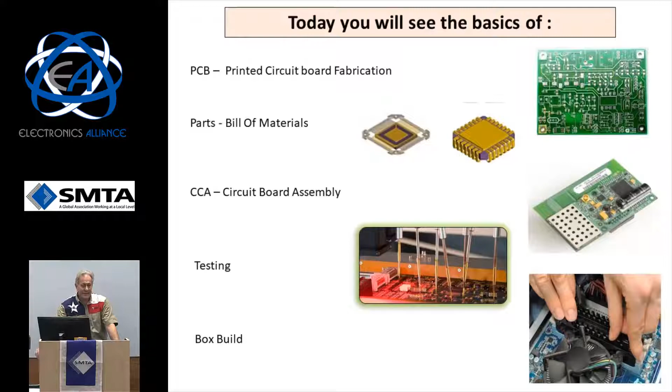So what I want to talk about today is PCBs, printed circuit boards, fabrication, a little bit on parts, a little bit on circuit board assembly, a little bit on testing, and if we have time, I'll touch base with something called box build. How many here are familiar with how multi-layer boards are fabricated already? Okay, you got some familiarity.

Okay, very good. So the top surface that you see over here, you know, we've got the solder mask with solder pads, and really circuit boards are multiple layers of two-dimensional circuits. So if you look at this circuit here, this is actually about a 6-layer circuit board, so 6 semi-independent layers that are all connected with vias that go through the board.

So the way electronics is done is you have individual layers as far as routing, and you connect one layer to another layer via these vias that go up and down, and then the circuits are connected on there. There's imaging going on, so it's a subtractive process. So you put materials on a circuit board and then you etch them off to leave a pattern. So you see about etch, and there's all kinds of photo masking, and then there's all kinds of routing that goes.

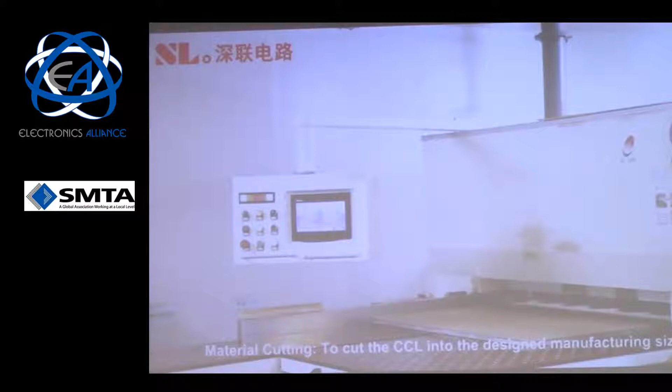Copper-clad laminate. It's the main raw material in PCB manufacturing, and also one of the main factors for PCB quality. Material cutting. To cut the CCL into the designed manufacturing size. The radius for CCL corner is needed to avoid the scratch during production.

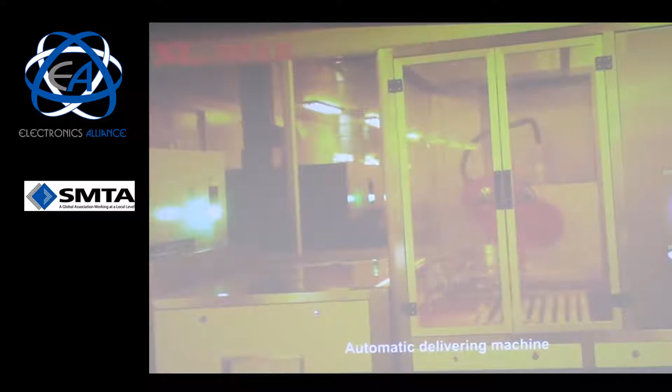Inner layer coating. To coat the photoreceptive wet film on the surface of the clean CCL. The requirement of clean room: 10K degree clean room. Automatic delivering machine. Automatic exposure machine. To transfer the pattern from the film onto the inner layer core material.

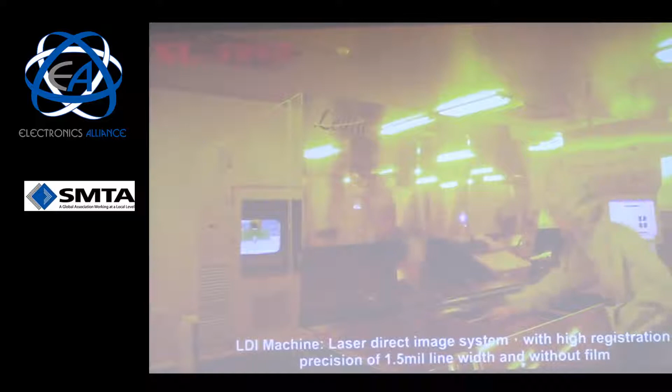Laser direct image system with high registration precision of 1.5 mil line width and without film. CCD automatic exposure machine. Traditional exposure system with film, transferring the pattern from the film onto inner layer core material. DES: developing, etching, and stripping. To etch the unnecessary copper and leave the pattern in need.

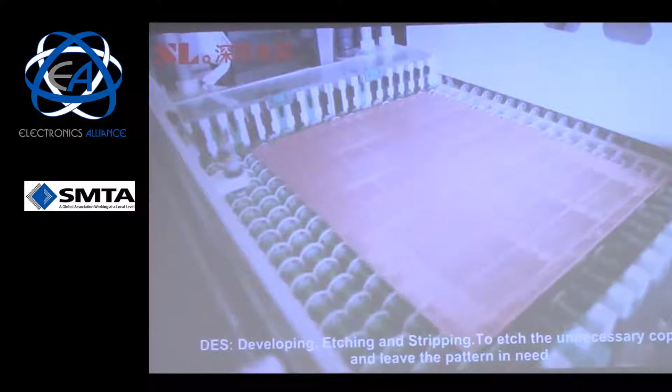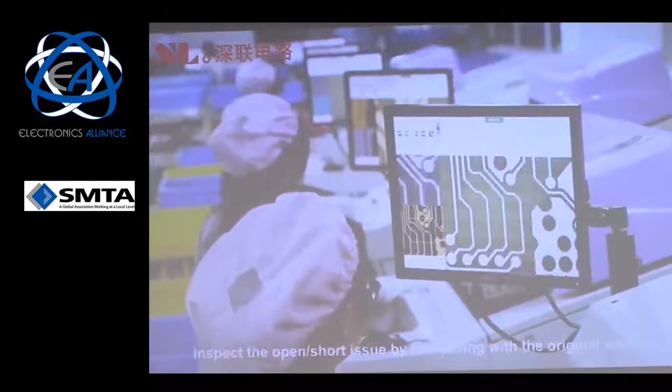Inner layer AOI, automated optical inspection. Transfer the image to the machine with optical reflection. Inspect the open short issue by comparing with the original working Gerber. Cutting PP. Cut the prepreg into the optimal panel size according to inner core material. Riveting. Rivet the inner core materials together with prepregs to avoid misregistration in the following production.

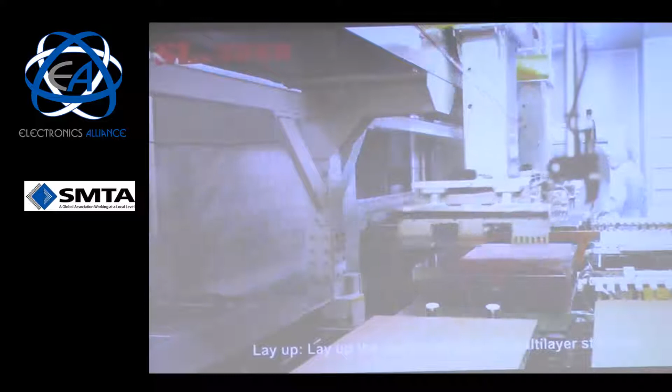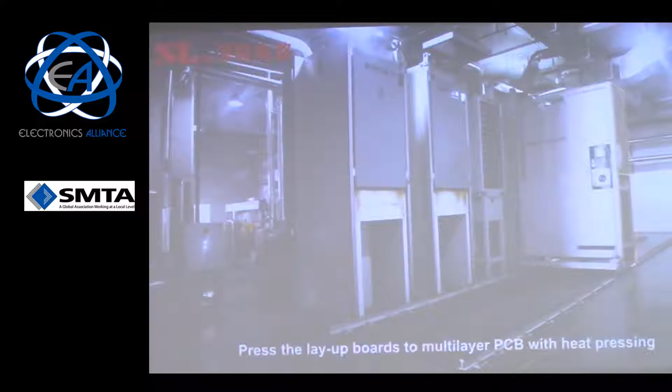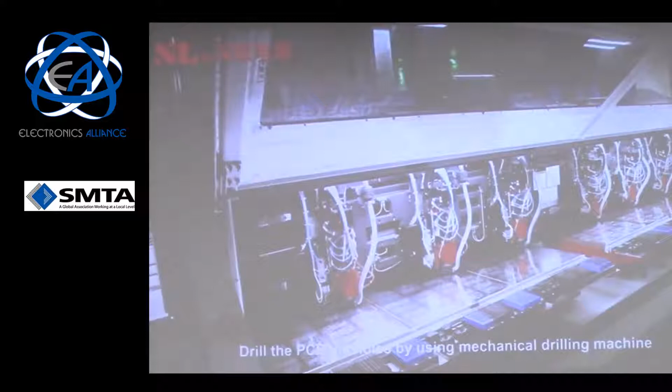Layup. Lay up the raw materials into multi-layer stacking. Pressing. Press the boards in high temperature and vacuum conditions. Press the layup boards to multi-layer PCB with heat pressing. Cutting edge. Cut the outlines of the pressed multi-layer boards. Mechanical drilling. Drill the PCB via holes by using mechanical drilling machine.

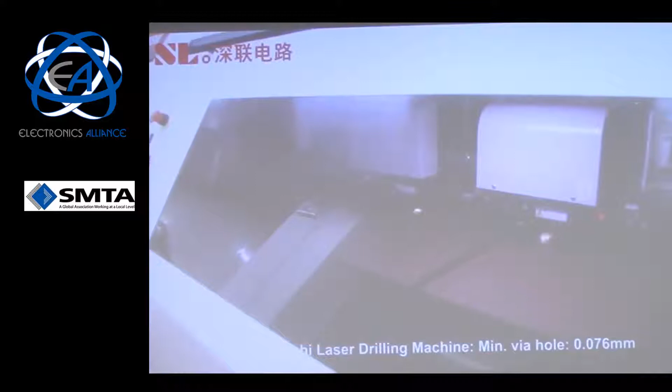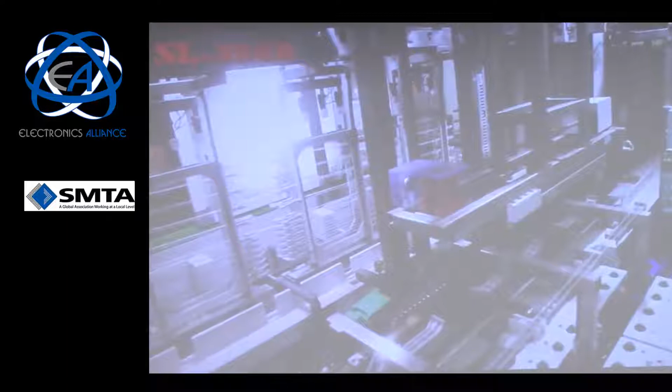Mitsubishi laser drilling machine. Min via hole 0.076 millimeters. PTH. Plate the copper in holes to make sure of the conducting. Panel plating. Thicken the hole copper and surface copper by plating. VCP. A machine with vertical copper plating system. A better copper plating performance could be achieved with the same manufacturing conditions of the same PCB part number.

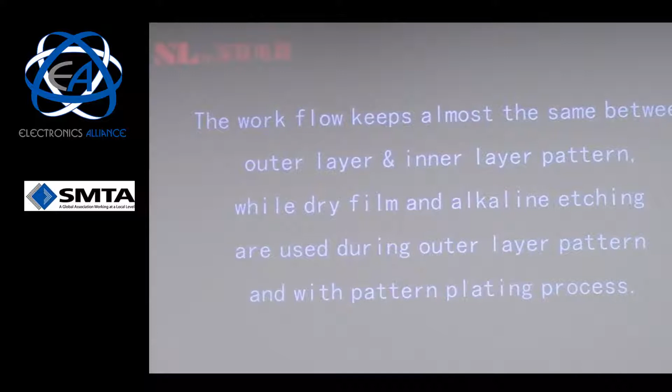The workflow keeps almost the same between outer layer and inner layer pattern, while dry film and alkaline etching are used during outer layer pattern and with pattern plating process. Dry film laminating. Outer layer developing. Pattern plating. Outer layer etching.

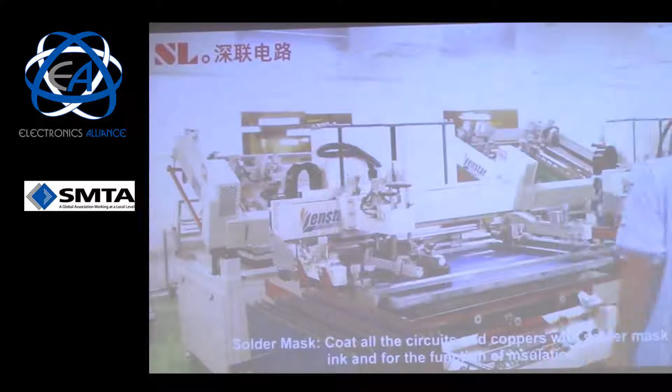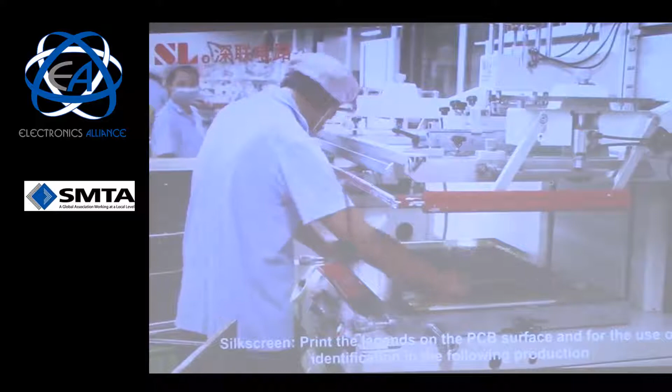Solder mask. Coat all the circuits and coppers with solder mask ink for the function of insulation. After the photopolymerization of developing, the solder mask ink remained and solidified. Silk screen. Print the legends on the PCB surface for the use of identification in the following production. Immersion gold. To form a cladding material with high performance of inoxidizability and solderability.

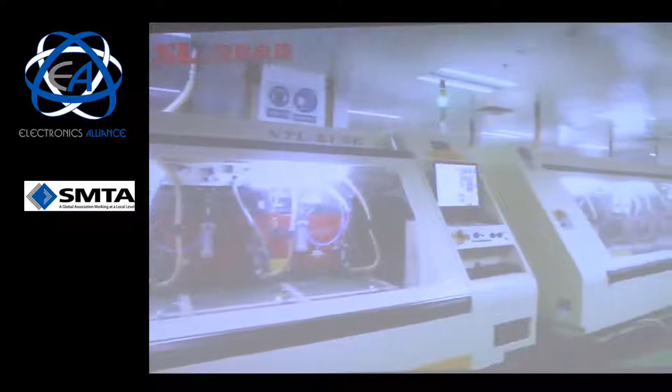Routing. To route the customized PCB outline with CNC routing machine. E-testing. To inspect the open short issue for finished PCB. Flying probe tester. For the inspection of prototypes and small volume orders.

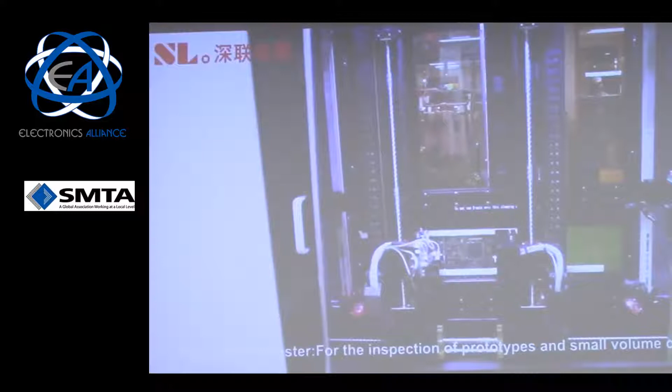FQC. Appearance inspection on PCB boards such as scratch, no solder mask ink, solder mask ink on pad, and so on. Automatic appearance inspection machine. The efficiency will be tripled comparing with human visual inspection.

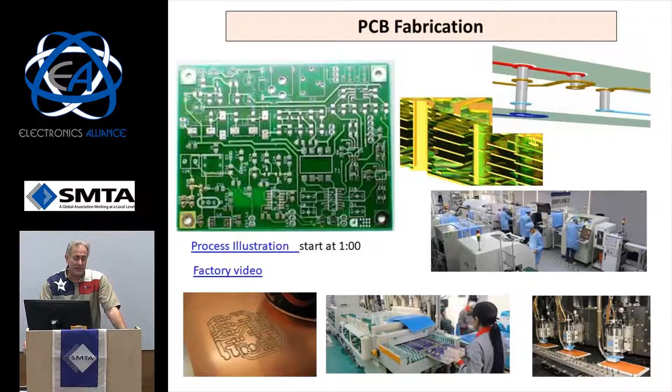Okay, I'm going to kind of move on from there. I want to give you at least a background on how boards are fabricated. PCBs are printed circuit boards. People call them PCBF for printed circuit board fabrication and PCBA for printed circuit board assembly.

In the additive process, that basically is starting with nothing and building up the circuit board from the bottom up to the top. So you're printing out insulating material, conducting material, building it all up. And you can do that now with additive manufacturing or 3D printing machines.

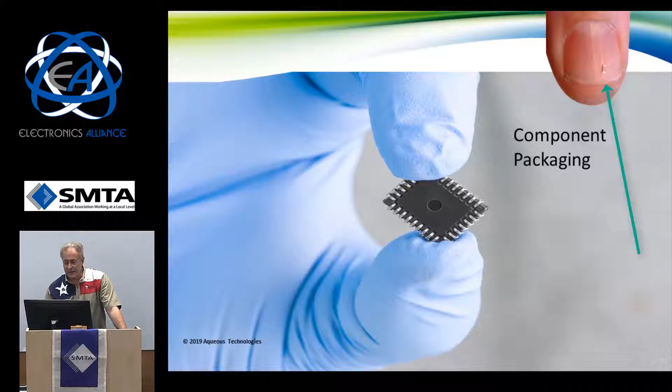What I want to talk about now are components. So years ago, this was considered to be a pretty small component. You can see that in here. Some are much bigger than that. So I'm going to talk about components in this phase. But if you look over here, there's actually a component right here on the fingertip. So parts are certainly small. Okay, I put this on here to show three different things.

Basically, in the 1960s, through-hole technology was in place, and if you look at upper left-hand corner in the 60s, these are all components that have leads that go through the board and are soldered from the backside. In the late 1970s, surface mount technology was created, and parts are soldered onto the top surface and onto the bottom surface of the board, so you got double-sided assemblies.

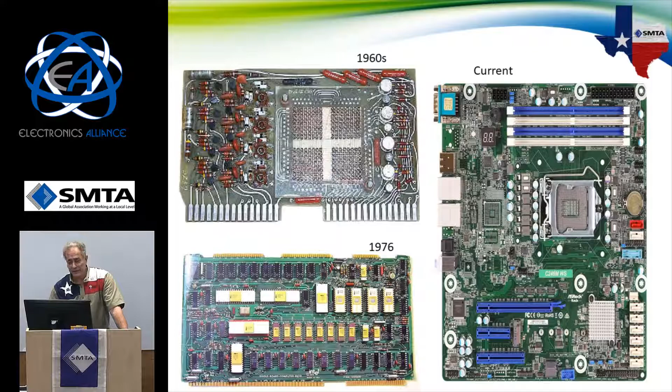And currently, you can tell a little bit by how much green you see. The green is a solder mask where there's no parts, but you can see all of the silver in here. That's actually solder. There's little tiny parts in here that you can't even see. So current technology is a mixture of through-hole and surface mount, advanced packaging, and sometimes direct chip attach. We take the semiconductor and directly attach it to the circuit board.

I thought it'd be good for you to have a feel for some of the components. So there's things called chip components, resistors, capacitors. It looks something like this. Plastic leaded chip carriers, PLCCs, quad flat packs. They're flat and they have leads on 4 sides. Small outline integrated circuits with the little leads here, J leads.

Over on the right, I put these through-hole parts. These are called radials. You notice it just comes straight out. Dual inline package is like an IC, which got little wings that come out that go through the boards. And then axial parts come out the sides, and they have to be bent in the manufacturing facility and then installed into the circuit board that way.

A few other pictures, just throw out some acronyms. I'm not going to go through all of them, but every part's got a different acronym with it. And I'm just showing here a better picture of the DIP and axials, radials. These are some of the discrete components I've got shown up here.

0402s right on down. This is a match head, so you know about the size of what a match head is. There's a little part right over here, 01005, so it's 10 by 5 thousandths of an inch, things like that. Pretty darn small, so you can imagine trying to solder something like that onto a circuit board. So we have the technology to do that, and that is commonplace now.

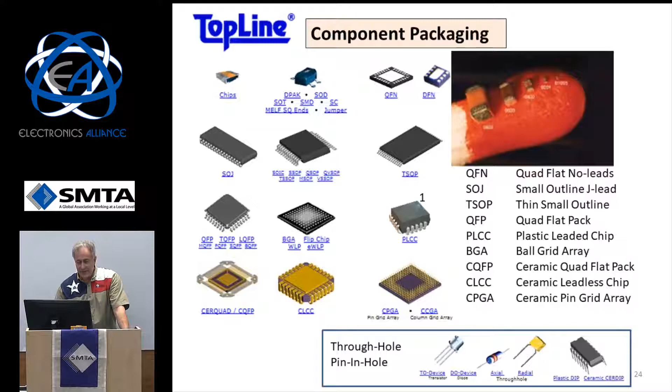Very bottom terminated parts. How many? I know most of you are electricals. Are there any mechanicals in the room? Okay, so I'm a mechanical also, and so we need mechanicals in there to package things up.

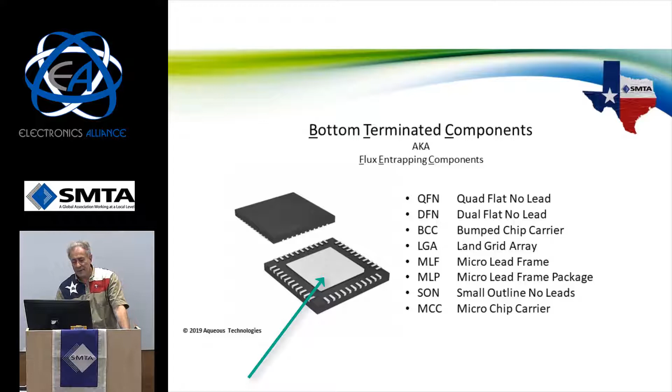But from a structural point of view, this big pad on here is to take the heat from the component and bring it down into the circuit board. There's a number of different mechanisms by which you can do that.

Now I'm going to talk a little bit about circuit board assemblies. So I've got some samples up here, and we've got some other information for you over here too about a meeting coming up and some other things about SMTA up here.

But a lot of different kinds of circuit boards. There's RF circuit boards. There's like transformer kind of things. There's some heavy copper in here, a lot of current going through here. LEDs that you'll see in lighting, all kinds of different lighting.

These are actually what they call rigid flex boards. It's rigid pieces of circuit board with some flex circuits between them, so that you can basically bend the circuit boards around different things. Small boards, back planes, power supplies, transformers, and big power supplies over here. So there's a lot of different kinds of circuit boards.

So what I'm going to do right now is, how many people have been into a surface mount assembly facility before to see how components are placed on circuit boards? Okay, good. So this will be a new thing for you. Anyway, so I got a picture up over here about a typical high-end factory. It's not a clean room per se. Semiconductors are in a very clean room, normally like 10 parts per million.

Typically around here, you'll see the smocks, but the smocks aren't in there for cleanliness. The smocks are in there for ESD, electrostatic discharge. The components are very sensitive to static, and the floor is conductive, the smocks are partially conductive, and there's a mechanism by which you can drain all the static electricity that you create in walking across the floor so it doesn't get onto the parts.

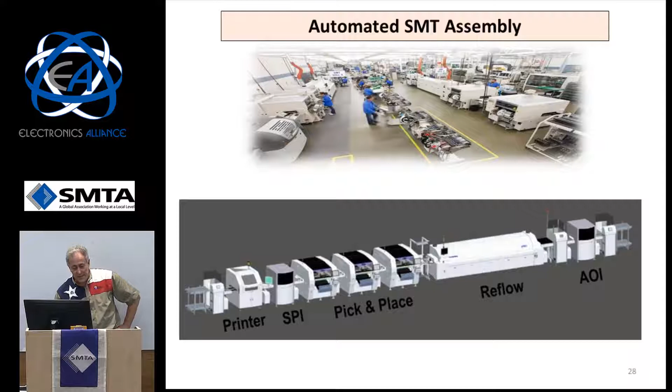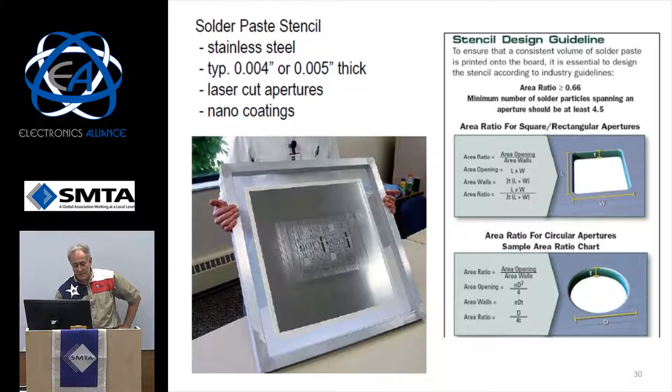So I'm going to click on an illustration here, and you'll see the stencil, and you'll see the machine, and you'll see a bar. And what it's going to do is take solder paste that feels like toothpaste. It's going to push it through holes in this stainless steel stencil. So there are laser cut holes in the stencil like this, and wherever there's a hole, it will deposit that solder paste inside the hole. And then when the stencil is pulled up, it leaves the solder on the circuit board where it's supposed to be. So I'll click on this here and see what that looks like for you.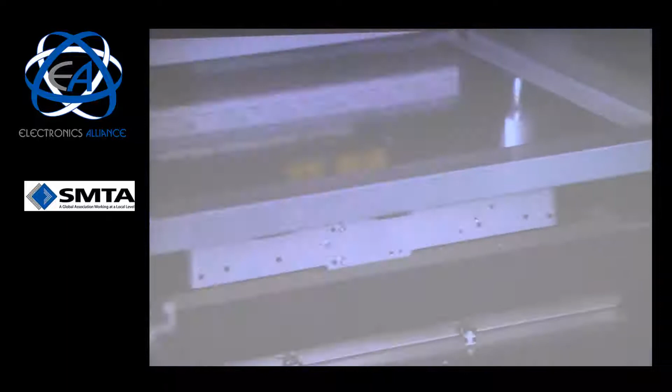Solder paste not only performs the function of a physical interconnection material, but it is the structural support, thermal interface, and conductor. It is critical to the manufacturing process that the correct amount of solder is applied in exactly the right place. We can accommodate a wide range of print formats. A laser-guided printer uses a scanning camera to quickly locate the fiducials and align the tooling and the PCBs accurately, while the transport system processes the boards with a minimum of handling time, and the solder paste height detection system guarantees the correct height of the fillet. The easy-to-use touchscreen makes programming faster and more precise. The printer prints and inspects each pad and solder joint after the solder is applied, ensuring the accuracy and reliability of the printing.

Okay, so this is kind of an illustration too. So you've got the squeegee over here pushing the solder into it, and you see the solder paste over here. And I put this out here so you can see that it just puts solder on the precise locations that the component is going to be mounted to. So the solder at this point is not reflowed. It's tiny spheres of solder that are held up in a flux. So it's literally a paste sort of thing. And then the parts are placed in that paste, and the flux and the paste actually help hold that component down.

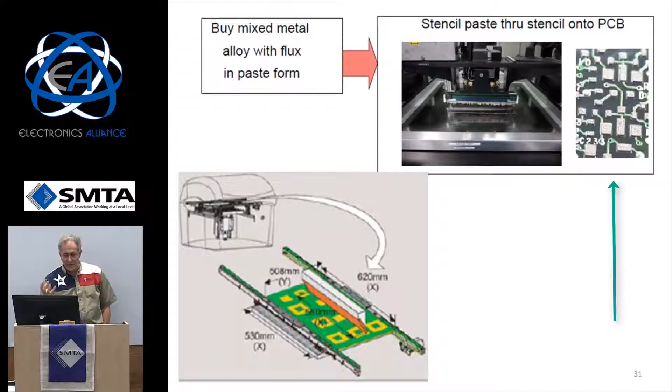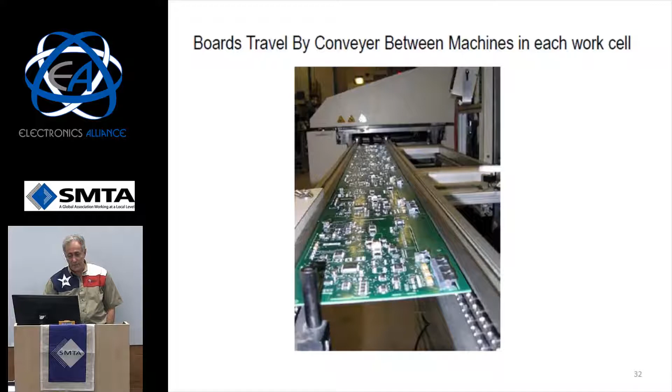And then because this is an inline versus a batch, between every one of the machines there's a conveyor. The conveyors are adjustable, typically from 4 inches to like 18 inches wide. So you would set up a line, adjust all the conveyor rails to the proper widths, and all the circuit boards will move through the line. So obviously you want to make sure that you have something on the edge so components aren't going over the edge of the board. So there's a lot of things when you design circuit boards so that they go into manufacturing. And whether you're an EE or an ME, you've got to make sure the parts on the board are placed correctly. There's 2 different component placement machines, basically. One places the small parts very, very quickly.

There's a lot of small parts on the board, and typically a few very large parts on the board, like your ICs and things like that. The ICs are much larger. They have to be placed a little bit differently with a lot of optical verifications as you go through.

So I'll show you the chip placer, but the other one's basically the same, just a different scope. We're a little bit limited on time, so I'm just going to show you this one here. But it'll start off at speed and slow down.

So I slowed it down right here so you get a feel for what it's doing. It's picking up parts here with the 2 heads, looking at it, and then placing it down on the circuit board.

Okay, so you can get a little bit of a feel there. Now that's not really called a high-speed machine. It's fast, but there are machines that are much faster than that. That machine is mostly a high-mix, low-volume machine.

So it's set up to easily put the parts on there, download the programs, but there are some machines that are much faster than that. Still, that's pretty fast if you look at placing parts on a circuit board. There may be 1,000 parts on a circuit board, so it may be on the machine for 30 to 45 seconds.

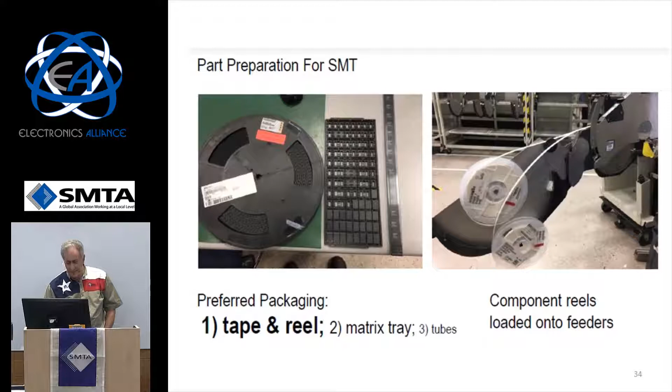Years ago, there were machines that automatically put some of these through-hole devices on there. Nowadays they don't have too many of the older machines to put the obsolete parts down, but there's still connectors and power devices that right now are hand installed because there's only a few of them on there.

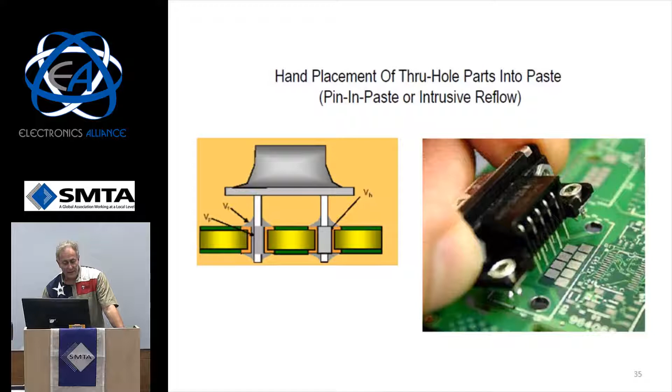I put this in here so you can get a feel of the mechanical part when the pins go through the holes and then the screws attach to it here. And then when you solder it, a wave comes on the bottom here and does a fillet on the top, and it wicks all the way through to the bottom and to the top. So that's how the interconnect, electrically and mechanically, is made.

So the boards are slowly heated up, and they run for, let's say, 30 seconds in the molten state, and then they're cooled down properly. That's to activate all the items in the flux, so you get a good solid connection.

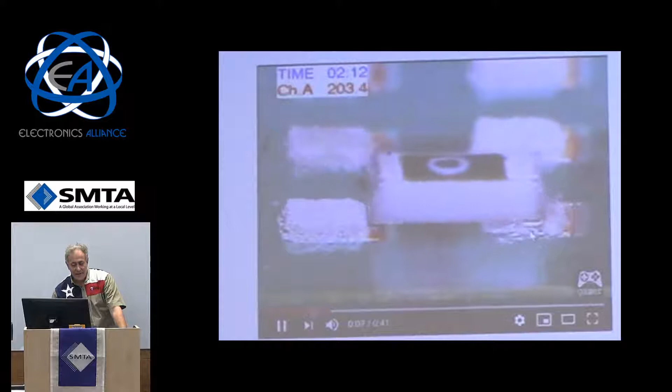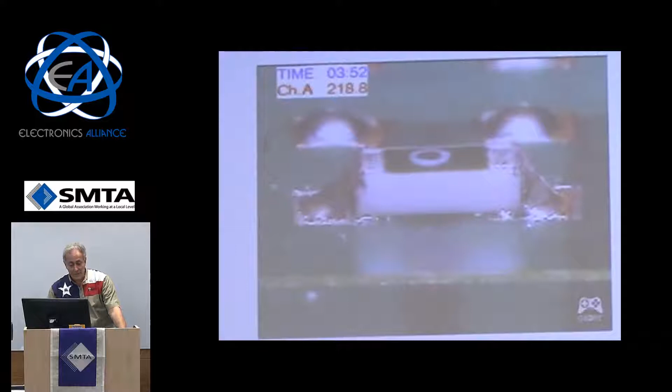I'm going to show you something here from a mechanical perspective, called self-aligning. So you see this is paste here, and it's going through an oven right now. You'll see as this solder becomes molten, this chip device comes up and actually adjusts and aligns — self-alignment to both sides. There's a surface tension here and a surface tension over here, and it balances the forces out, to show you a real-time view of what that soldering process looks like.

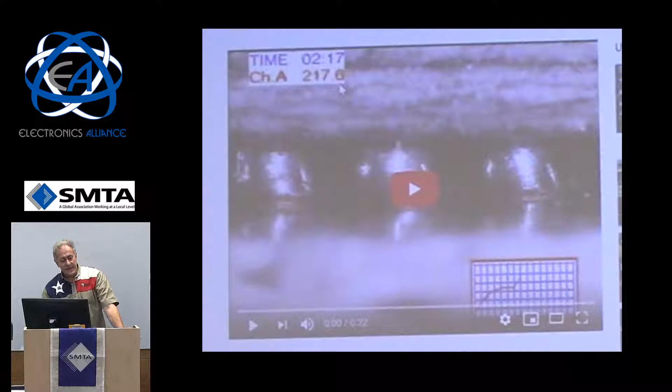So you'll see it actually fall down and collapse. You see the paste on the bottom, balls on the top. It's going liquidus right now, all melding between, and there's the ball collapse. You see how nice and uniform they are, with no short between one ball and the other going through there. Anyway, that's a very interesting picture of what happens inside the oven.

Years ago, operators had to just look at every single solder joint on a circuit board. Now we have AOI, automated optical inspection, which is basically an optical comparator. It looks down on the parts, knows what parts are supposed to be there, the orientation, the symbolization on them, and it'll look at a dozen parts at one time very quickly, looking through the entire board. Anything that looks unusual or out of place, it flags to the operator, who makes a call about whether it is an actual failed part or not. If it's failed, it goes into rework. If it's just a cosmetic thing, the inspector can let it go through. So the inspector actually makes the call of defects versus good parts.

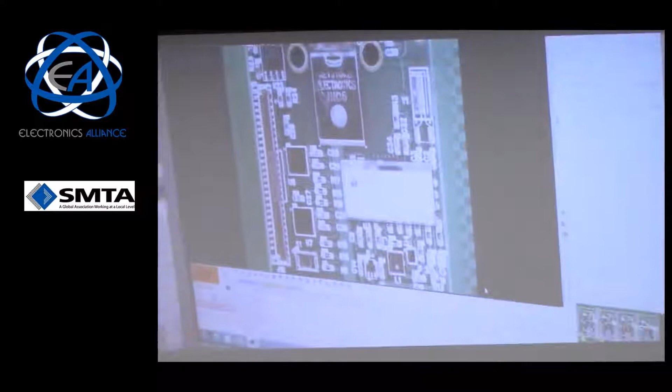You see by that, it did about 3 screenshots per board. So in the time you saw it, it inspected all 12 of those boards, something like that, so you get a feel. Then you saw a red light come in at the end, meaning there's a defect on the board. It would go to that location, and the operator would call about whether it is a true defect or not. So they'll only have to look at maybe 1 or 2 questionable things on a whole circuit board rather than potentially looking at 1,000 sites on that board.

So I talked about how you solder surface mount parts, and now we'll talk about how you solder through-hole parts. Years ago there was another wave process that was done, but I'm not going to touch on that here today. Instead I'm going to talk about something called selective solder.

If you look at the through-hole parts I talked about, the pins go through the circuit board and come out the bottom. You have to apply solder to the bottom of the circuit board, and it has to wick up along those leads and come out the top. What you're going to see in this video is a machine that does leaded solder, and another that does lead-free solder. Notice the circuit board is mounted into the machine, with optical cameras up top to help align the top to the bottom. There's a nozzle on the bottom of the machine with a liquid solder pot right below it, which pumps molten solder up through the nozzle, streaming it out the top. It then moves along the bottom side of the board to solder all of the pins in the through-hole connectors. I want to give you a feel for what it is, description-wise, so you know what you're looking at here.

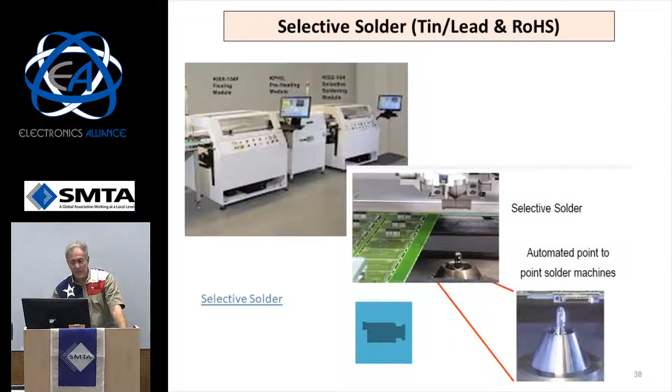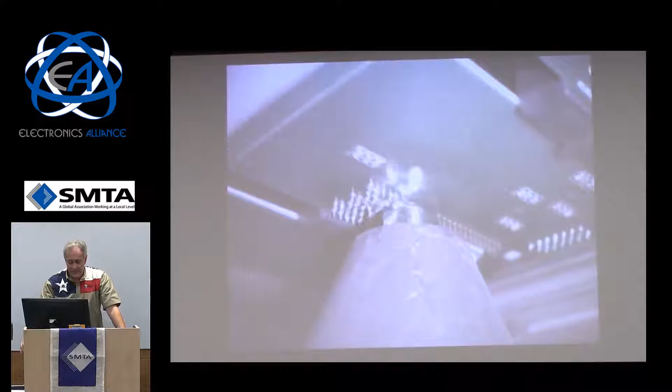This is actually looking at it from the bottom side of the circuit board. You see the solder mask, the green stuff, which helps isolate the solder so the pins don't short from one to the other. We don't want any exposed base metal, that's why we solder masked that. This is a 180 pin connector, and as it moves through here, the board is kept kind of warm, but what really does the soldering is this molten solder coming across, moving in an XY location on the bottom side of the board to solder all those. You can see this is a whole lot faster than trying to hand solder something like that — it would take somebody a long time, and this is actually much more accurate and much more uniform.

I want to move on to test right now. I've got 2 slides on test. There's a continuity test about whether all the parts are put on the board correctly, and then there's a functional test, which is on the next slide.

There's basically a fixtureless test called a flying probe test. There's no hard fixturing here — it's just these probes that are pre-programmed to move around the circuit board and make contact. For the double E's out there, it's like when you're looking at a circuit board and you take your meters or your scopes and hit power, ground, and signals, looking at what the signal is.

This is doing the same thing, making sure there's no opens or shorts on the circuit board. It's checking power to grounds and all of the continuity, making sure you've got the right values of resistors and capacitors on there, and that's what we see over here. Then this is a bed of nails tester, which may have 4,000 pins in here, and all 4,000 pins may hit the circuit board at one time. Then within the software, you do all your electrical testing.

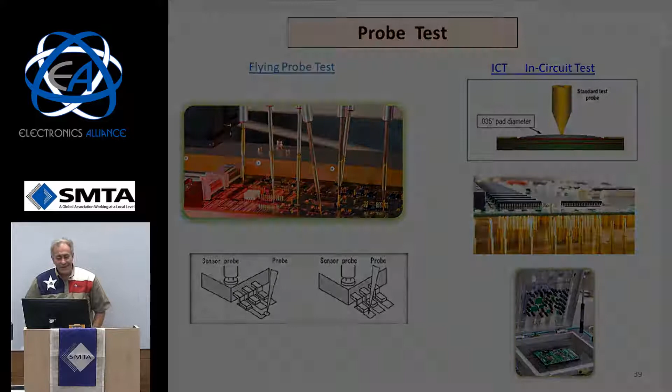So I'm going to show you a flying probe test over here, so you at least get a feel for how this machine would act a little bit faster than a human using probes. There might be 8 probes on the top of a machine like this, and 3 or 4 probes on the bottom side of the same circuit board running at the same time.

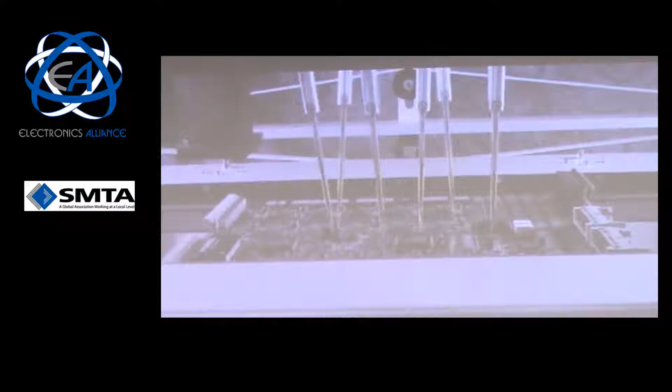I think you got a feel for what that's like. It kind of looks kind of bionic and kind of freaky jumping around on there. It's obviously a whole lot faster than an individual technician trying to do that.

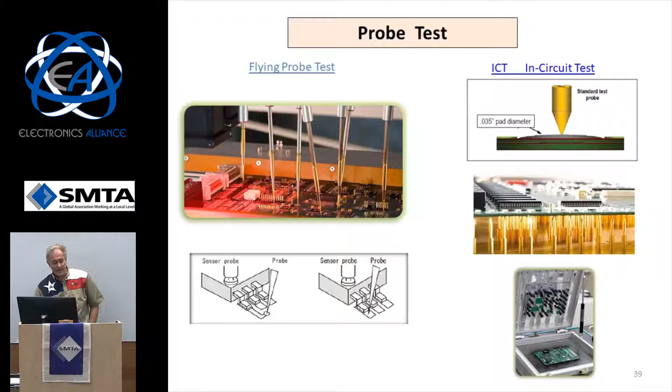The bed of nails tester has no moving parts, but I'm showing a fixture on the right-hand side, and it touches the pads. From a design perspective, EEs or MEs, you've got to have enough space on the circuit board and enough little pads over here. So I put this picture over here where you've got the component with the lead, and then the pad sticks out a little bit with the little test pad over here. So you have to identify what parts of the circuit you want to put test points on, and you have to have little hooks on some of the ends of it to make it accessible. You can't put test points underneath the components and things like that—they've got to be accessible. There's a certain amount of angle that you need to be able to address every one of those here.

So I'm going to let this run a little bit. This is something called boundary scan or functional test. Functional testers, boundary scan is something very, very unique to that particular thing. What that means to me is a continuity tester just means you built the board the way it was designed. Functional test means it actually does what you intended it to do. It may be built completely perfectly, but it may not function because of tolerances in all the components, and you have to make sure everything balances out.

So there's a little bit of audio on this one. I think the EEs in the room might find this to be interesting. Let's show us a little bit.

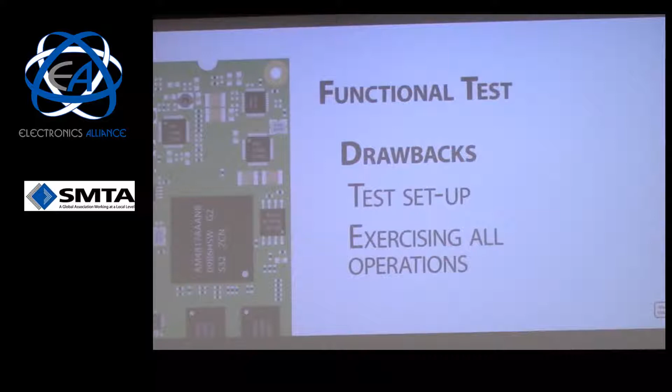Historically, the most straightforward way to test electronic systems has been functional test. As the name implies, it means exercising a system as it is expected to be used in the target application. Though this approach continues to have merit, it has some significant drawbacks. First, it may be difficult to replicate a functional setup that sufficiently mimics the end application. Second, sufficiently testing the operational space of systems with even moderate complexity can be very difficult. An alternative to verifying functional operation is structural testing. This method tests individual partitions instead of looking at the system as a whole. It enables a more thorough testing that can verify corner cases, which are difficult to access using only functional test.

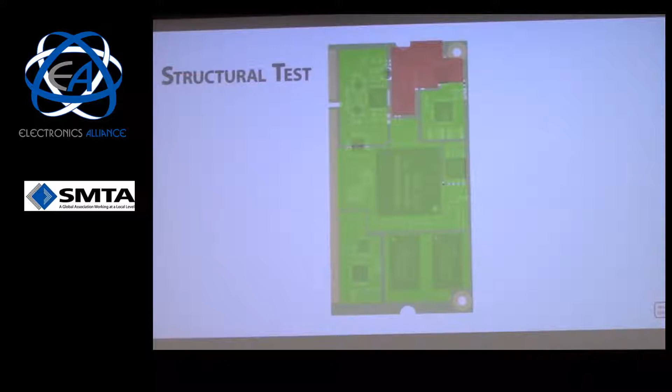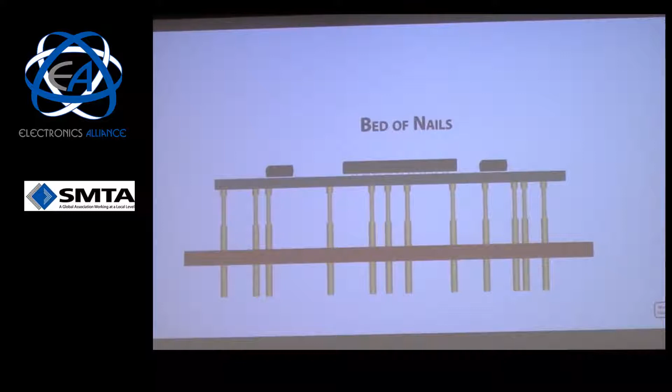Structural test also has problems to overcome. Gaining access to internal nodes is a challenge. One traditional method for accessing internal nodes is employing a fixture with multiple electrical contacts touching down on exposed metallic pads. This fixture is commonly called a bed of nails. Unfortunately, these fixtures are costly to fabricate and difficult to make a solid connection when there are many points to access simultaneously. This method becomes even more problematic as circuit technology shrinks with a higher reliance on multiple layered boards. It makes internal access almost impossible as nodes are buried under packages such as ball grid arrays.

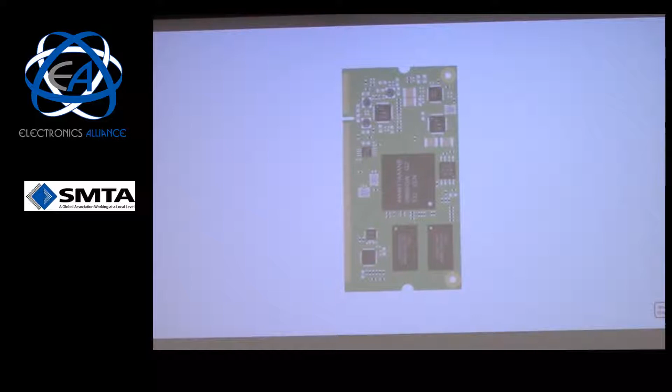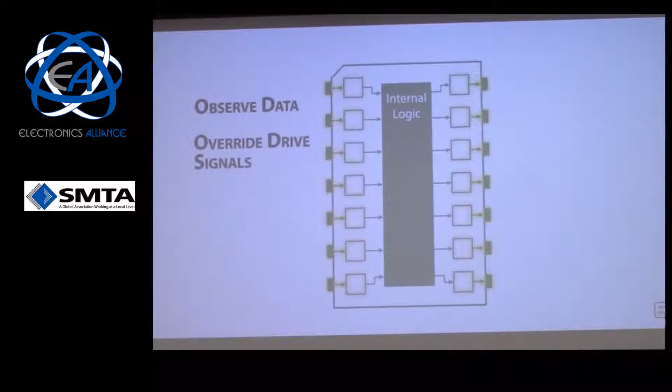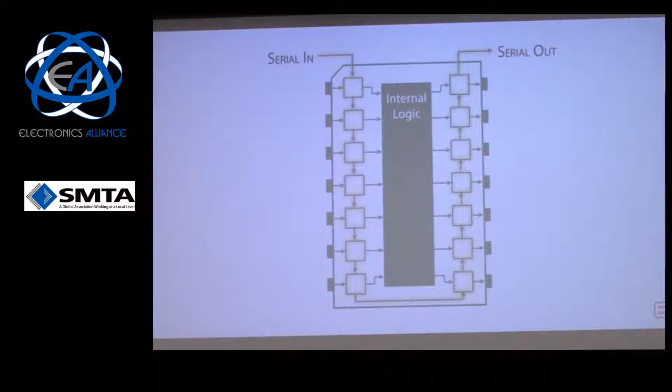Boundary scan is an ingenious approach to structural testing that overcomes these challenges. Instead of relying on mechanical connections for access, it adds dedicated test circuitry to the system's ICs, using special registers inserted at the I/O pins. These registers can observe data on the I/O pins, and they can be used to override drive signals, providing test stimulus to the circuit. It's this combination of stimulating and observing internal nodes that provides a powerful mechanism for accurate structural testing. To gain test access to these registers, there's a separate serial data chain independent of the functional paths. Test setup information flows into the chain's input, propagating to the chain's output. If there are multiple ICs with boundary registers, they can be concatenated to make a longer chain.

This same data chain is also used to offload measured data. We could go on about that, it gets deeper and deeper the further you go. But anyway, that tells you a lot more functionally about how you can exercise that circuit.

The other thing is from an X-ray perspective. Used to be the parts were pretty simple, only on one side of the board. Now you've got parts on both sides of the board, ball grid arrays, things like that. Now you have to be able to look underneath the part, inside the part, all around.

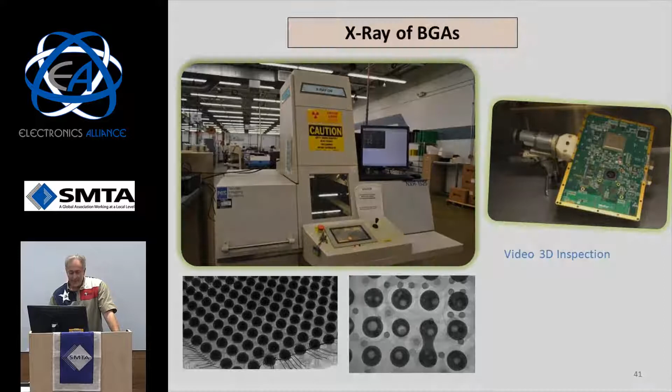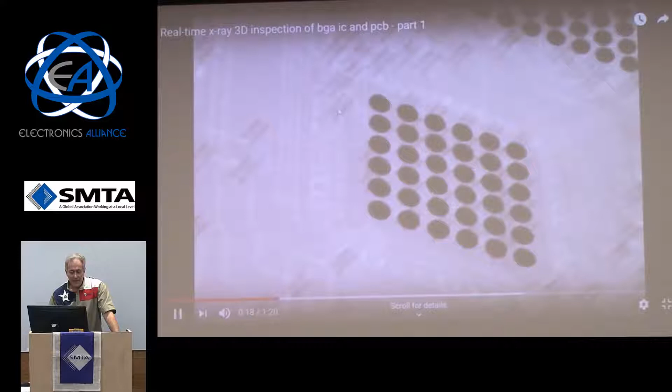So I'm going to show a quick example of an X-ray machine, and this is a three-dimensional X-ray machine. You'll see it kind of moving around, and as it zooms in, you can see the solder balls like the ones I showed you. These little wires coming out here are the bond wires connecting the die onto the substrate, and these tunnels right here are the vias that connect layers. You can see them moving around in space as this moves in a three-dimensional way.

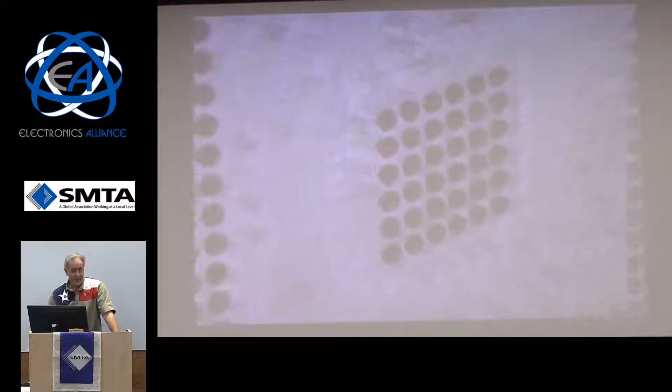The vias connect it from one layer to the other layer, going up and down. So you can see there's no shorts between any of these solder balls here. That's what the computer is looking for. If there wasn't solder on one of the balls, you would certainly be able to see it at this point also.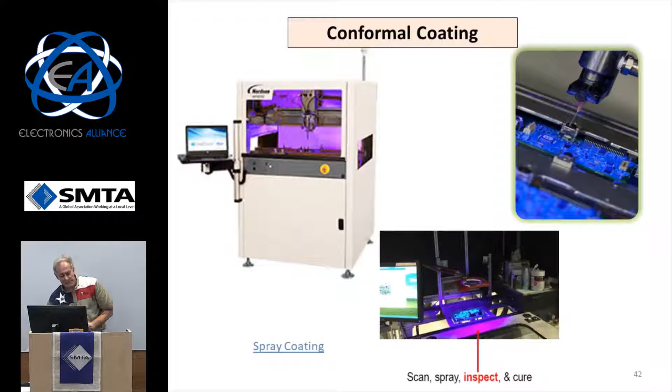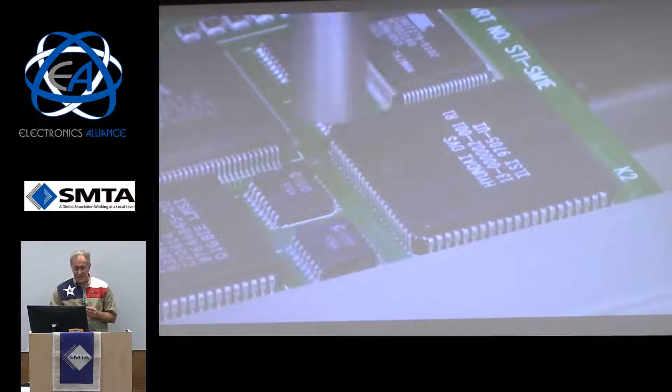Conformal coating is used on some downhole applications and other applications that might be susceptible to moisture coming in, and you want to coat the board to make it less sensitive to moisture. Think of this like spray painting - you're basically spraying a material, and this is a good example of what that looks like. It actually covers the part. Obviously you can't go underneath the parts, but it sprays everything. What you obviously don't want to do is conformally coat your connectors.

So this is a three-dimensional machine - actually it's four-dimensional because it rotates, and it goes around and conformally coats the devices without coating any of the parts you don't want coated.

If you think of a ball grid array, you might have 1,000 interconnects on one device with solder balls on the bottom, so obviously there's no way to get a soldering iron in there. For somebody who wants to remove a part off a circuit board and put it back on again, this comes down, heats it up with hot nitrogen, gets the part good and hot without heating the other parts around it, then reaches down, grabs that part, pulls it up, and you do it in reverse to put it back down. So you can unsolder and resolder components after assembly without bothering all the other parts in the area.

On the box build side, I'm not going to go into too much of that, but basically every circuit board's got to get placed into some kind of device - a cell phone, a car, something like that. That's called a box build. There's some cool automation on the box builds here.

I think I've seen this in the Terminator movie for some reason.

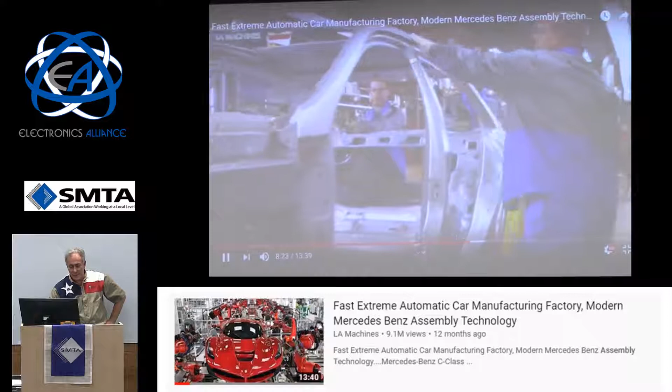I think that's the Mercedes-Benz plant, but it's pretty typical of what you'd see at GM or anywhere else. A lot of the people are doing inspecting and lining up parts, whereas the machine is doing the heavy stuff. You can see how it's just maneuvering a dashboard into place. That part was interesting to see how those things are done. Automotive plants - we realize how much tooling they have to put in to get those factories running. Those are automatic screw machines, so you push the dashboard in and all the screws get put in place on the robot over there.

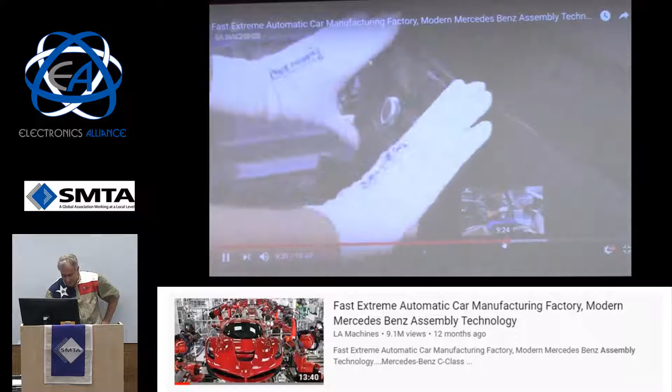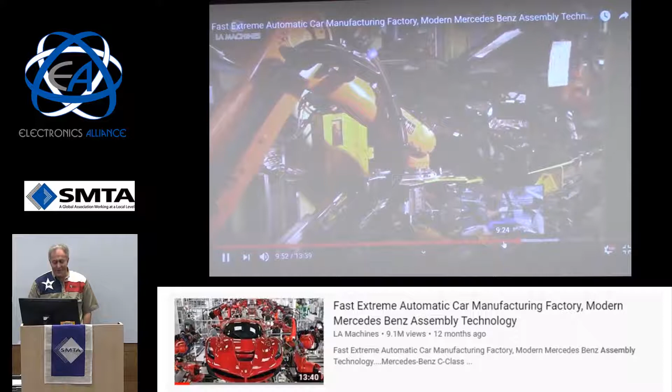About 30 seconds. I thought it was kind of interesting to see the chassis moved in - it's basically got the transmission on it, and it just drops the top of the car onto the bottom of the car, and then there's all the welding attaching the frame to the cover to the chassis.

So if you think about it, think about how many engineers you need to design all of the machines that are involved here. What we're doing is taking the manual jobs that are very, very low skill, and giving a lot more jobs to all the people making all of the robots and machines. It's a lot more satisfying to engineers to design things.